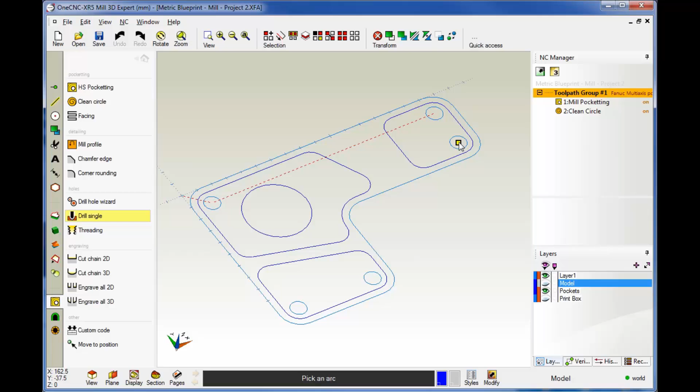Hello, this is Patrick with OneCNC West, and what we're going to do in this training video is take a look at a different way that we can drill holes within OneCNC. Now, in our last example using Mill Project 1, we used drill single, and this is where we get this little dialog box. We select how we want to select our holes. Once we're done with that, we right-hand mouse click, hit finish, and then we go to work.

But in this video, what I'd like to do is demonstrate this operation here called the hole wizard. I'm going to zoom out and pan down just a little bit to give us some more room. I'm going to go with drill hole wizard. I'll just left-hand mouse click. As soon as we do this, OneCNC automatically scans the graphic area, and it categorizes or groups the holes into separate groups based upon their diameter and depth.

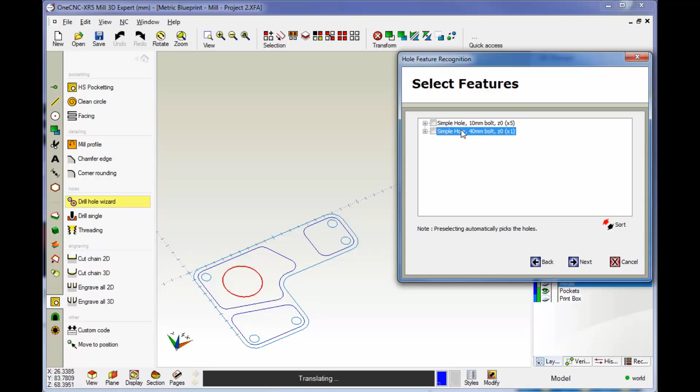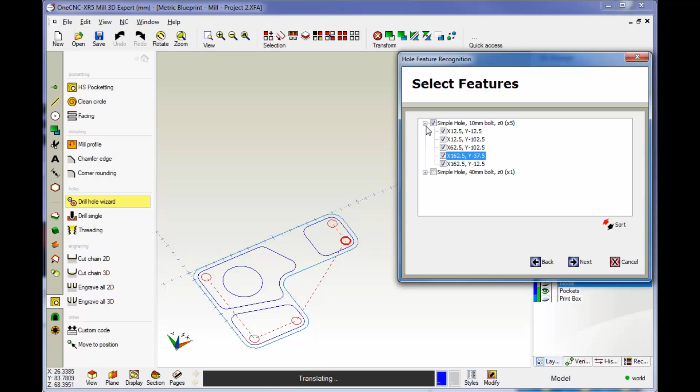So you can see OneCNC has found two groups of holes, and as I left click on each one of these groups of holes, OneCNC verifies the selection by showing that selected in red over here within the graphics area. Now let's say that you and I would like to drill these 5 holes. To do that, all we need to do is just check that box right there. Notice also that you can expand this and you can also deselect holes if you want. But in this example, we're going to drill all 5 holes, so I'm going to leave those alone. Once we do that, we'll click Next.

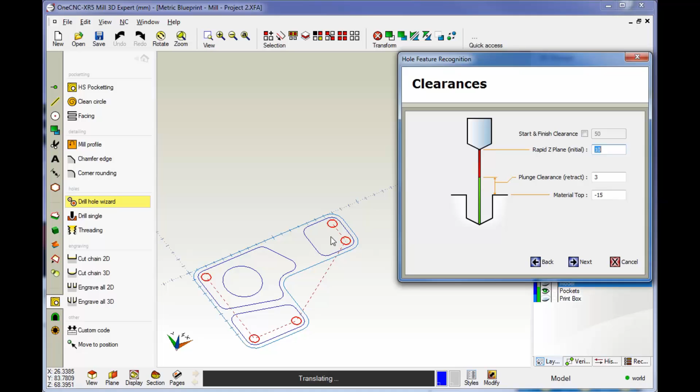Here's our clearances dialog box. I have a rapid Z-plane set to 10 millimeters. Our plunge clearance, this is where we're going to start to feed down, set to 3, and our material top set to minus 15 millimeters. Now the reason why it's set to minus 15 millimeters is each one of these pockets has already been machined to minus 15. Let's go with Next.

Alright, so within the settings dialog box, you have the ability to select multiple machining operations for the holes. So for example, we could center drill, countersink, and then tap all those holes. So one of the advantages to using Hole Wizard is you can perform multiple machining operations to your holes. Now I'm going to keep this simple. I'm going to right-hand mouse click. We'll select Remove All. I'll click Yes to confirm that. And why don't we just drill these? So I'm going to just left-hand mouse click on that.

Over here on the right-hand side in this blue area, this is actually a preview of the cross-sectional view of your holes. Now right now this is blank because we haven't filled anything in yet, but as we start to fill in parameters, this cross-sectional preview area will start to come to life. Now to fill the parameters in for this drill operation, just simply take your cursor and double left-hand mouse click.

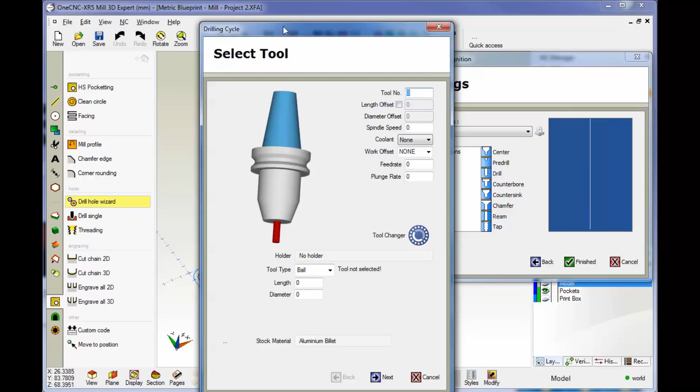Once we do that, we get this dialog box, and you've seen this before. This is where you want to select your tool. You can select it from the tool library by left-clicking on the graphic or tool changer, or you can manually define a tool. In this example, I'm just going to manually define it. We'll say it's in turret position number 3. We'll give it an RPM of 3000. I'll select my coolant, and for a feed rate, I'm going to put in 0.5 for that.

There's 2 feed rates, XY and Z. The reason why there's 2 is because you can do more than just drilling operations. You can in fact perform milling operations with an end mill, for example. So all this looks good. Let's change this now to a drill. We'll come down here and select drill.

That looks good. Alright, for the length, this is how far the tool sticks out past the holder. I'm going to put in 40 millimeters for that. For the diameter, we'll put in 10. And then the included angle, I'm going to put 118. So you can see this is your included angle right there. All this looks great, so we'll click Next.

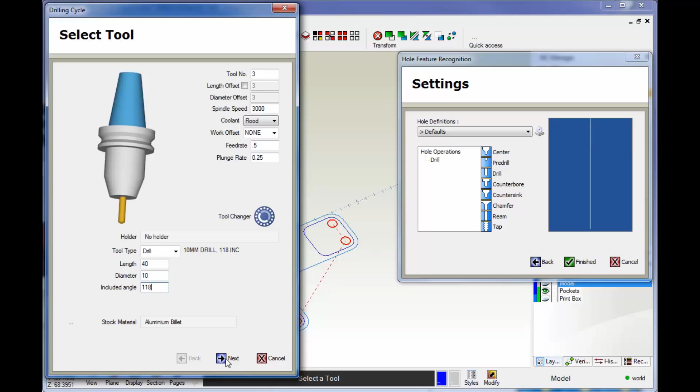Okay, so under hole style, you have machine cycle and automatic drilling. Machine cycle is if you'd want to use a canned cycle like G81, G82, and G83. If you don't want a canned cycle, you would select automatic drilling, which would output just simply rapids and feed moves, G0s and G1s. If you want to machine the holes using like an end mill or something, you can select profile, helix, or clean circle. But I'm going to go with the canned cycle.

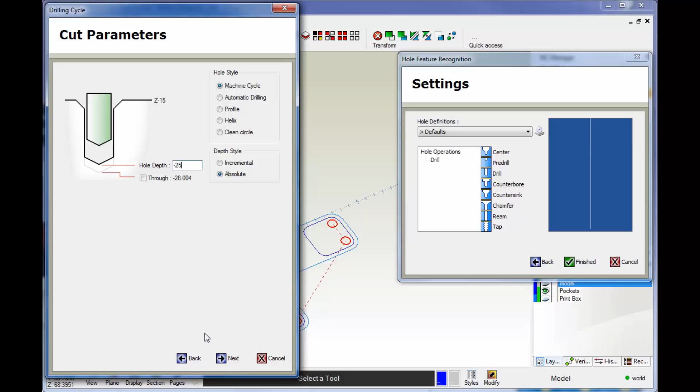For the hole depth, I'm going to put in minus 25 millimeters. That looks good. And because I have the machine cycle selected, when I click Next, OneCNC is going to give me a list of canned cycles I can select from. I'm going to go with the G83 deep hole, and for the peck amount, I'm going to put in 4 millimeters for that. Go ahead and click Finish.

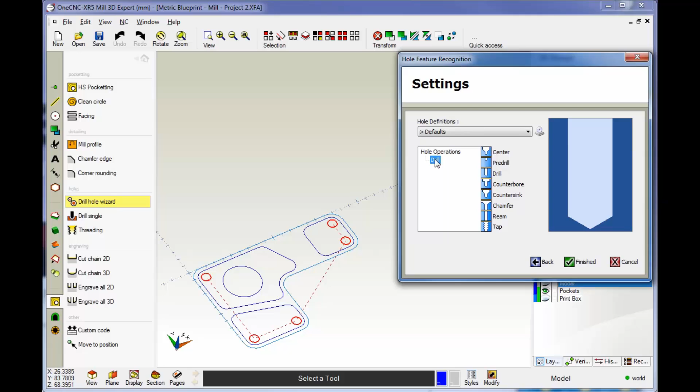As soon as I do that, you can see our preview area has come to life. So there's a cross-sectional view of the hole. If I had performed a counterbore or a countersink, you'd see that up here as well. So this is just a nice confirmation to make sure that we have these parameters filled out. Once we're done, we can click Finished. That looks good. And there's our drilling operation.

Why don't we preview this? I'm going to right-hand mouse click, and let's bring our solid model back. That looks good. So we'll right-hand mouse click, and let's select Preview and take a look at this. That looks good. And there's our hole operation.